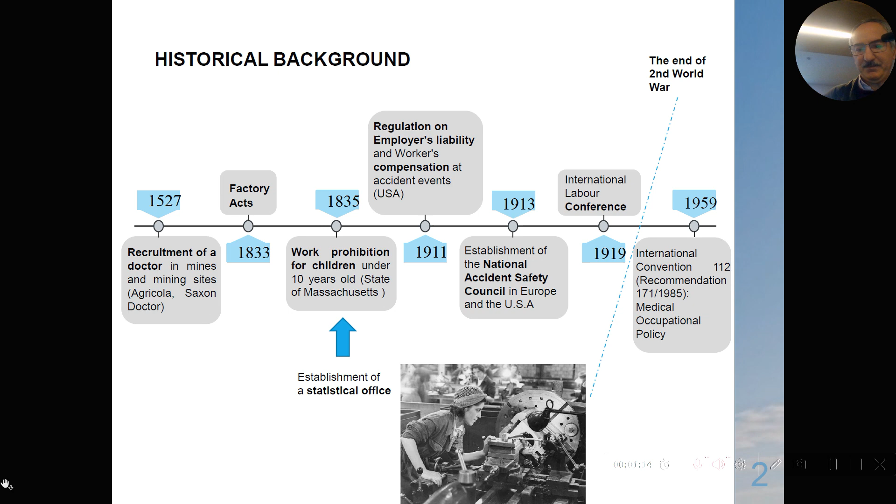Framework directives are applied in Europe and in Greece. More specific laws, as the Presidential Decree 105 in 1995 and the Law 3850 in 2010, are also applied, regulating matters for employees such as training of them, protective measures, responsibilities, and the monitoring of the processes, etc. Every working place must have done the recruitment of a safety technician and an occupational doctor. More information about legislation can be found at the site of ELINYAE, Hellenic Institute for Occupational Health and Safety.

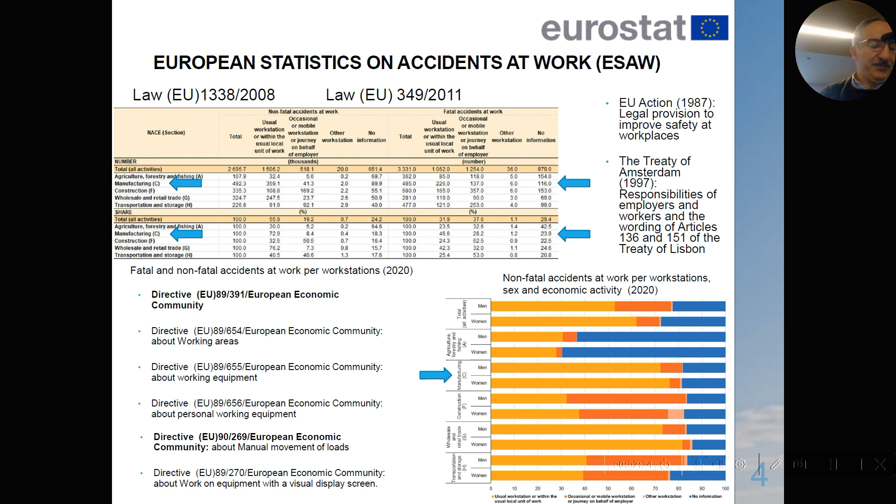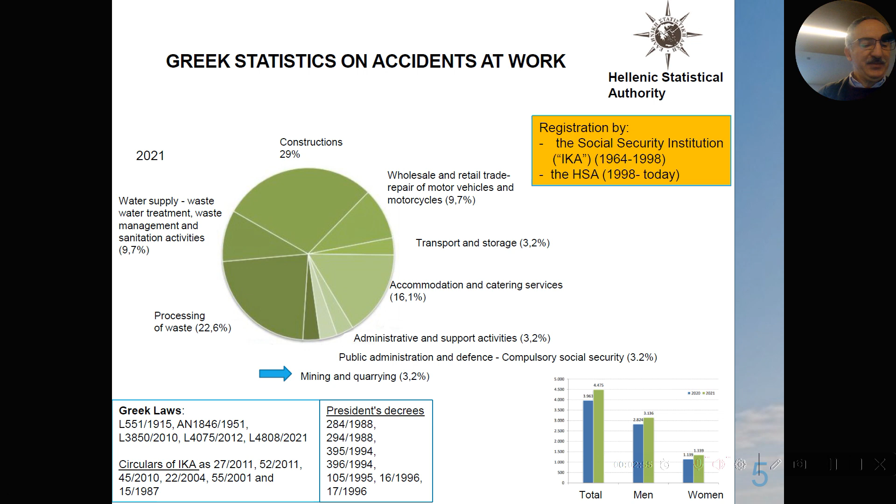Some of the Greek laws are presented, and the statistics about the accidents on work are given at these diagrams. 3.2% of the whole number of accidents at work occur at places of mining and quarrying. The statistical numbers are similar also according to the sex, male and female.

The enterprises care for the safety and health of the workers and visitors. They are inspected by the Hellenic Labour Inspectorate. They employ a safety technician and an occupational doctor, or they commission their studies to the external protection prevention services, called EXIPP. The company is responsible for ensuring compliance with safety measures according to the changes that may occur.

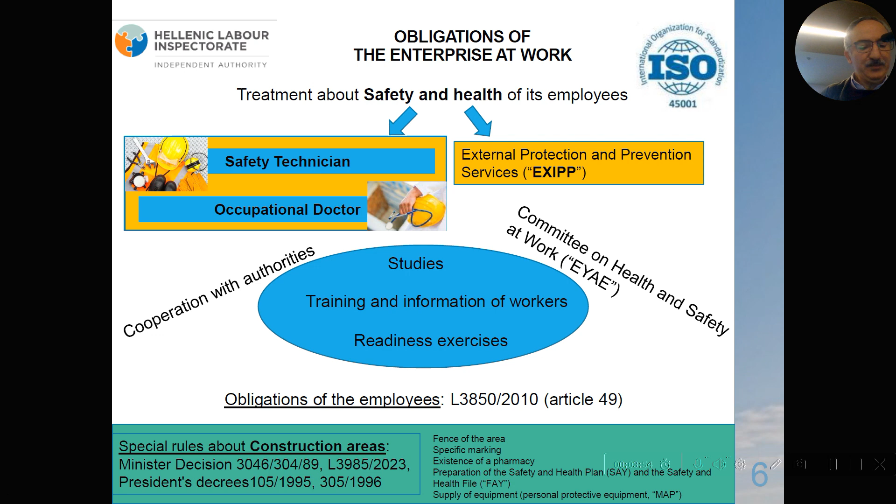The company shall cooperate with the responsible inspectors of the authorities. A committee on health and safety is monitoring the situations of the working places. Obligations of the workers exist, and specific rules about the construction areas exist too.

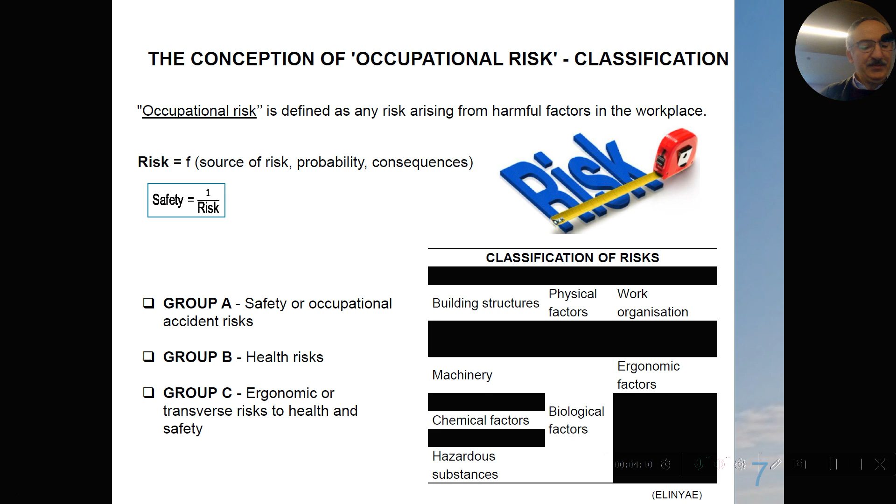The occupational risk is assessed according to the source of the risk, the probability, and the consequences. The table presents the classification of the risks, which consists of 3 categories.

For the assessment of occupational hazards, it is necessary to record the sources of hazards and the number of workers exposed to them. At the same time, a distinction must be made between qualitative and quantitative risks, depending on whether the risk can be completely eliminated or what protection measures are appropriate. After the review and the revision of the process, a file must be kept about the recording of the historical accidents at work, about the methods of the risk analysis.

There exist qualitative, semi-qualitative, and quantitative methods according to the available data.

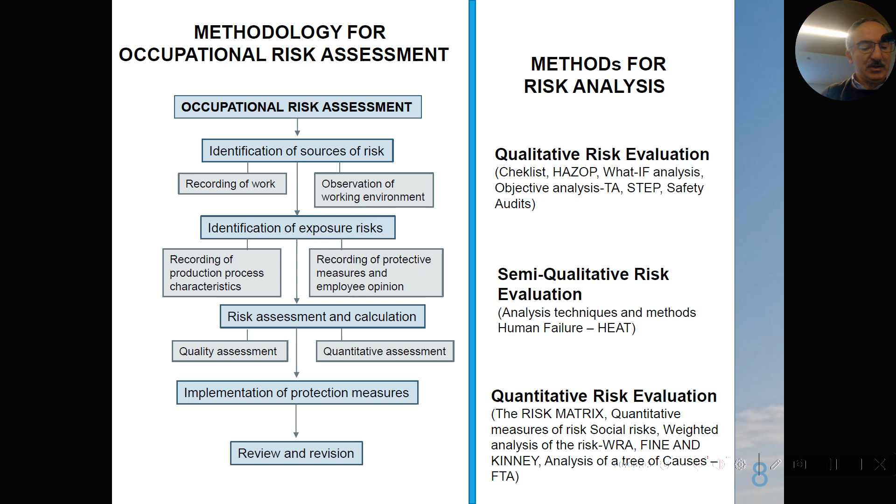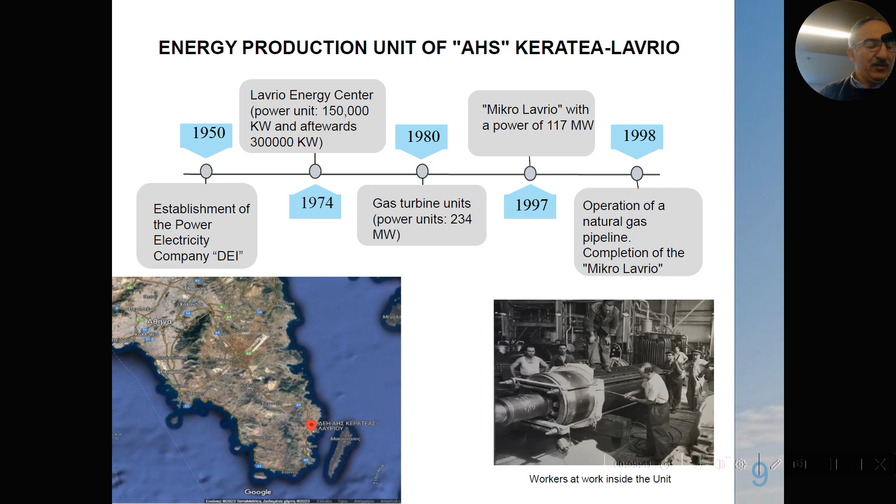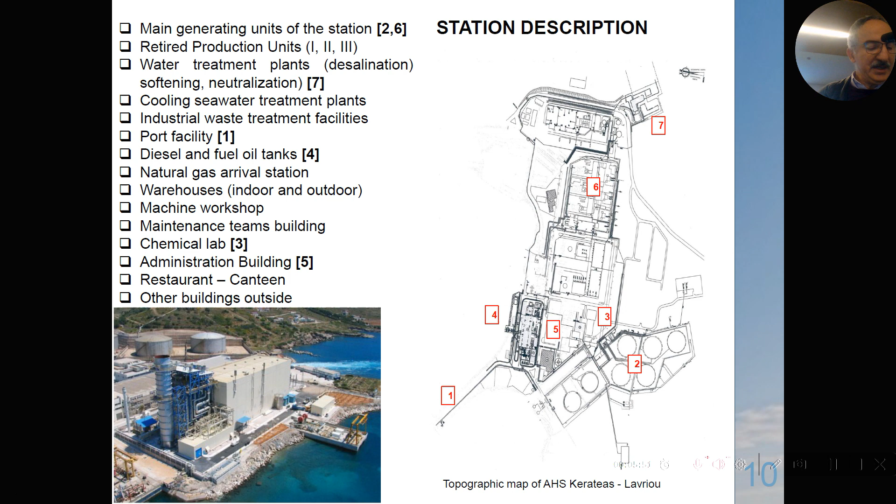The power station consists of the units of the presented list. Here is a topographic map of the area.

The station today has two units for production using natural gas and diesel. These materials are unloaded at the port facility and stored in the existing tanks.

On the station's premises, there are storage areas for materials used during maintenance, as well as chemicals for chemistry checks. The chemistry department operates all day, carrying out continuous checks.

In addition, seawater treatment plants are in continuous operation for the cooling of plants, and industrial waste treatment is also in continuous operation. The energy production unit produces electricity power of 550 megawatts.

Preventive medical checkups are carried out and an ambulance is available. There exists a pharmacy, medical records, and tests carried out using an audiometer, a spirometer, and optical control.

Some views of the unit are presented here.

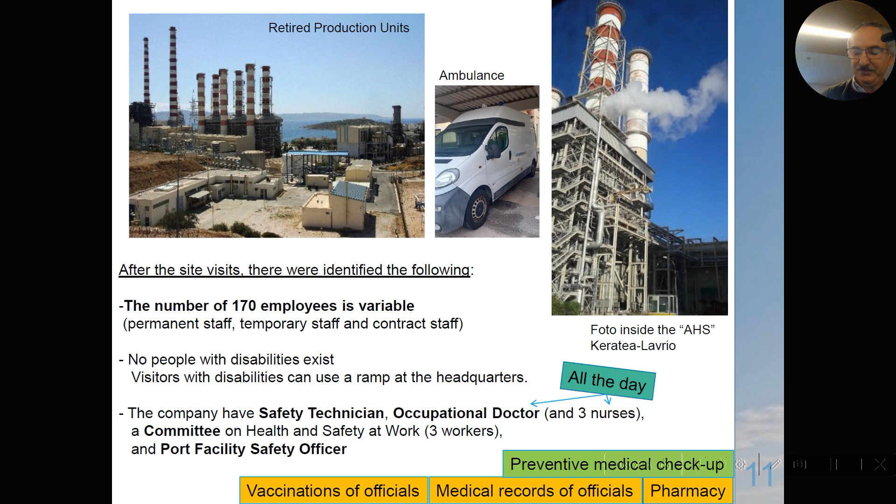Safety and health guards, such as safety technicians and occupational doctors, interact with the book for writing instructions, the book of accidents, and the book of measurements of harmful factors.

In the event of an accident, it is recorded with a full description of the data and notified to the competent state authorities. Until now, only minor accidents have been recorded. During 2023, only 5 minor accidents occurred.

The station safety plans that are provided are the health and safety plan, the emergency response plan, the safety plan of operations, and the port security plan / port facility security plan. They contain useful data about the power station that are reviewed at regular intervals.

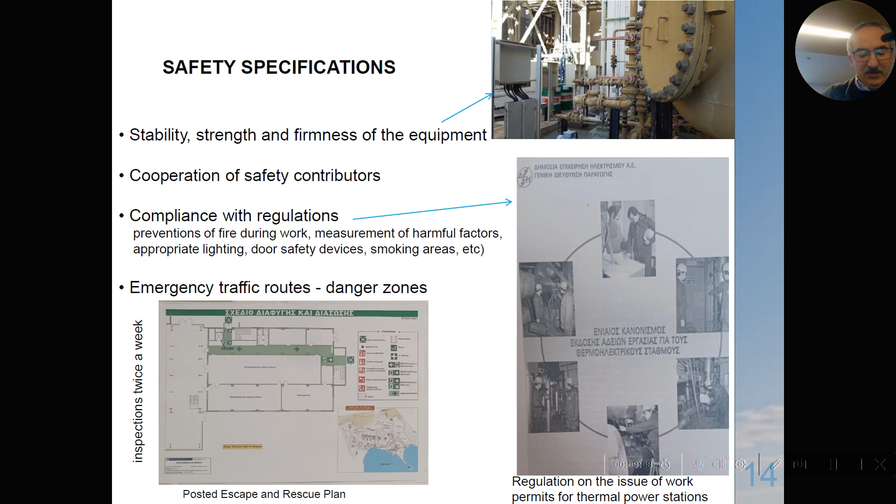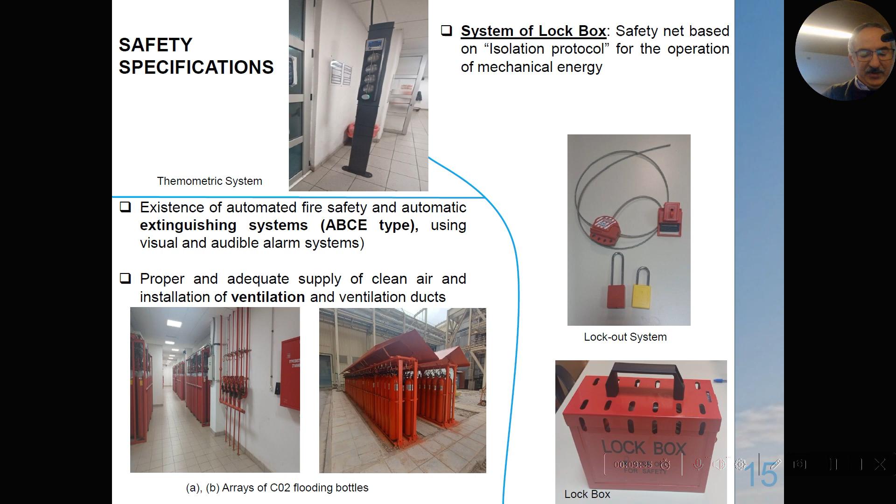Thermometric systems have been installed for the entrance of employees and visitors. A system of lockbox and lockout ensures the safety of working places when work is performed. Extinguishing systems prevent situations in case of fires of all types.

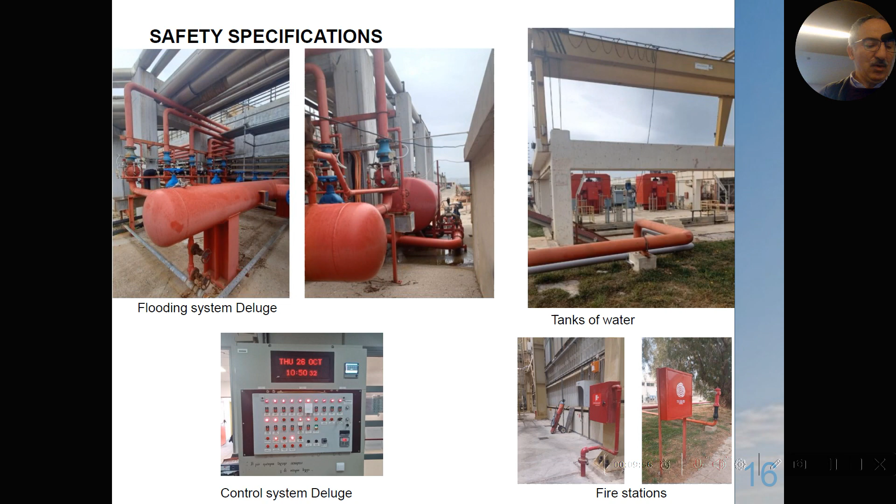Fire stations have hoses connected to the central water supply system. There is a CO2 flooding system and fire pumps, as well as water tanks. Also, ventilation of the working places keeps the air clean.

Many signals exist at AHS Keratea-Lavrio according to legislation. Independent officers and committees are responsible for the implementations.

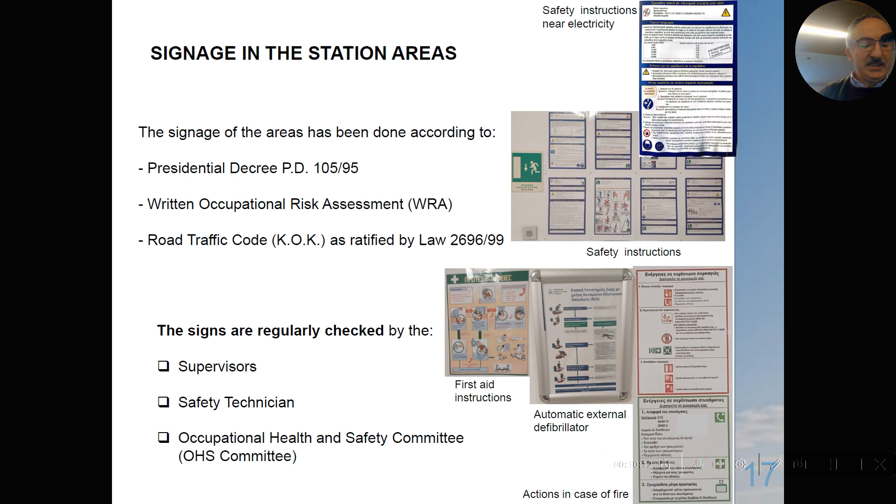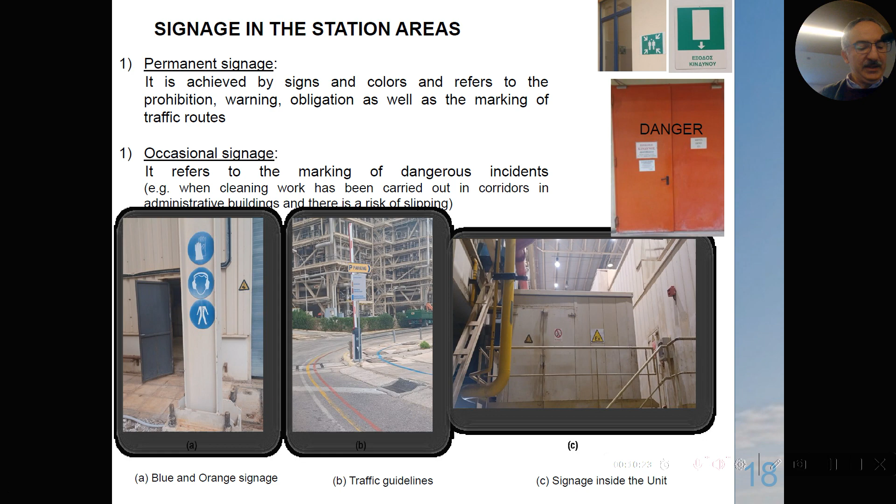Signals in the station areas are permanent or occasional, depending on the cases. Employees must use personal protection equipment such as helmets, boots, masks, etc. during their work.

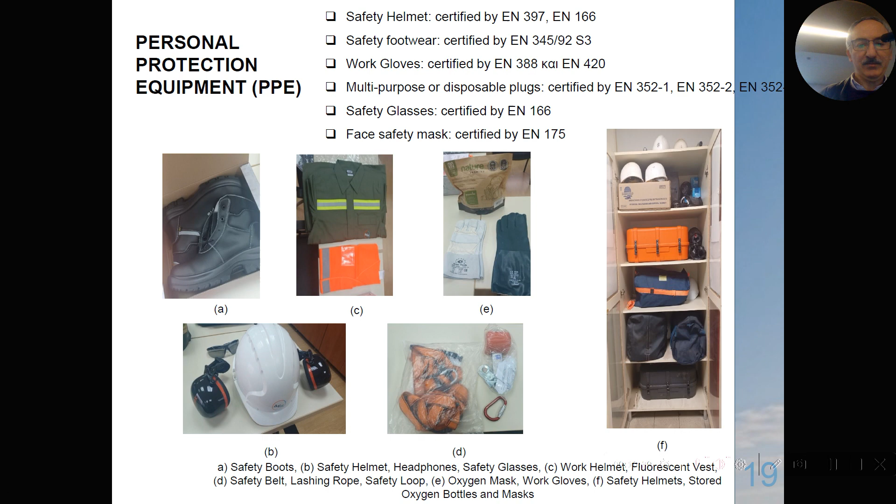The categorization of the risk was performed in cooperation with the safety technician, the occupational doctor, and the port facility safety officer. After visiting the area, a recording was done with a checklist about health and safety issues. The issues were categorized into 3 classes: high, moderate, and low hazard.

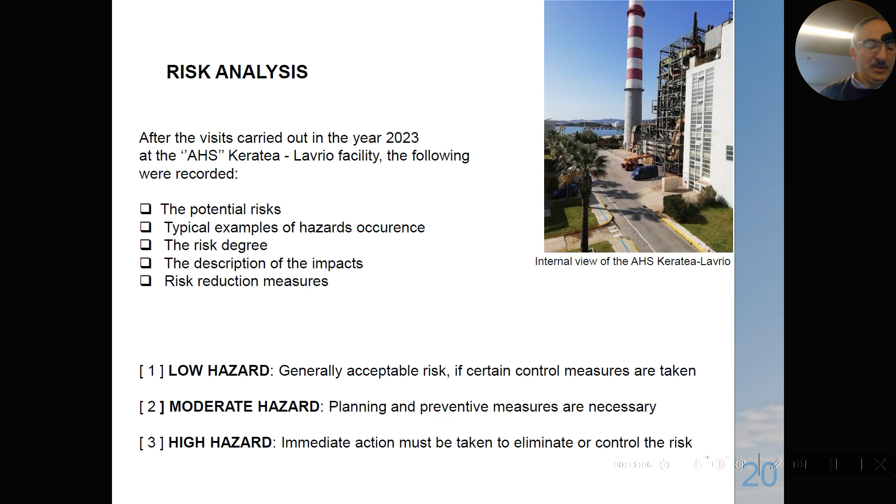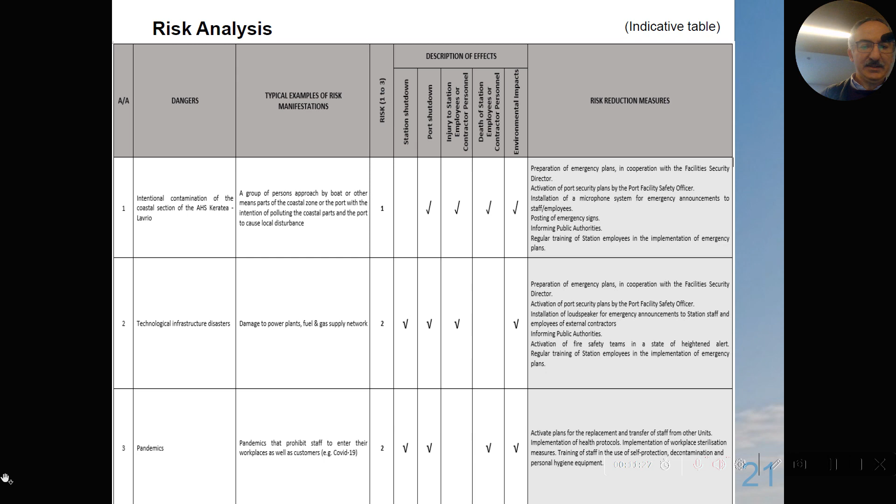These are the results, an indicative table of some indicators and their categorization into the 3 classes: 1, 2, or 3, low, moderate, and high hazard. Here is one more indicative table.

Also presented are more indicators of our study about risk analysis in the AHS Keratea-Lavrio. These are the factors that were considered.

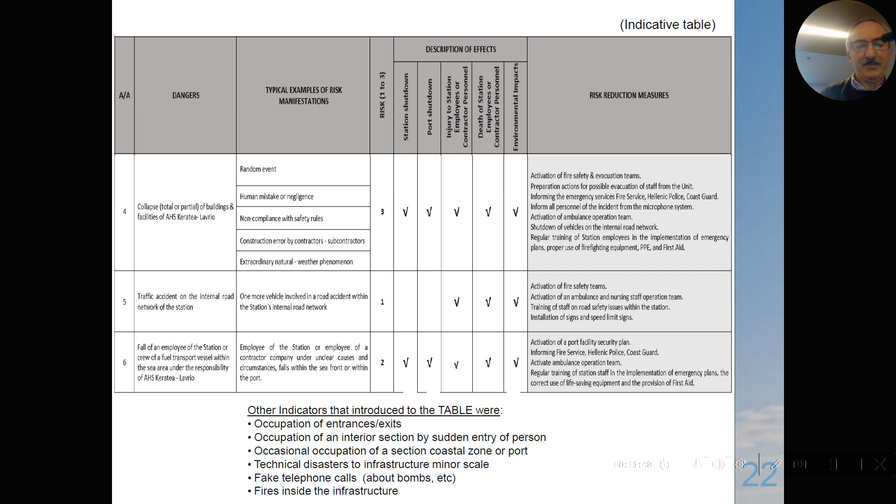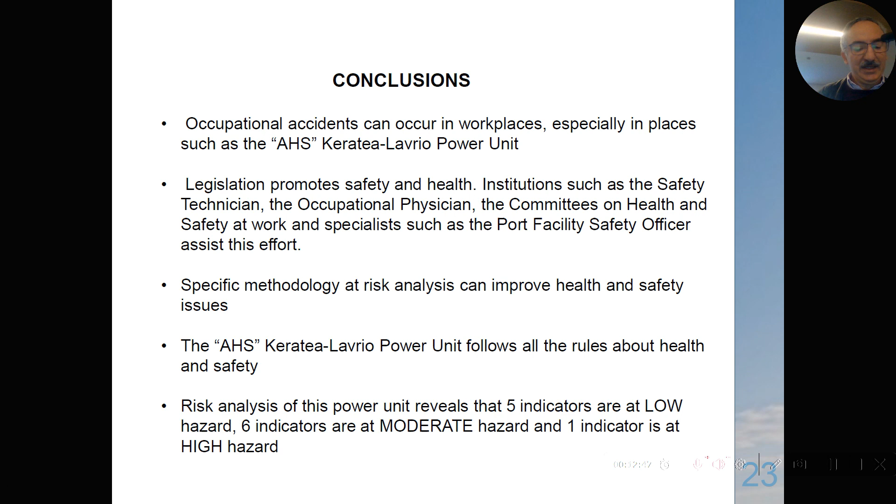Risk analysis of this power unit reveals that 5 indicators are at low hazard, 6 indicators are at moderate hazard, and 1 indicator is at high hazard.

And previously we must focus on this: the methods that we can use to assist protection. Thank you for your attention.

Thank you, Professor, for the very nice presentation.